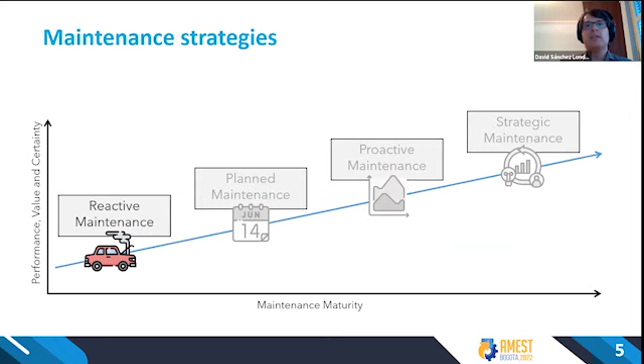So maintenance strategies have evolved ever since the first industrial machines required any sort of repair, right? So a long time ago. And these strategies have matured from simple corrective actions to more complex strategies. So the first of these strategies used to maintain machinery is reactive maintenance. And in reactive maintenance, we handle failures once breakdowns occur, right? So this means that machines operate until they fail, and at this point, they are repaired, if possible, or replaced with new machinery.

Now, this strategy can lead to unexpected machine downtime and high economic consequences because of the cost and the resources that are associated with repairing machinery that fails unexpectedly.

So as time went on, engineers realized that for the most critical machines, they couldn't simply afford to just let them fail. So planned maintenance was born. Now in planned maintenance, we have an association with maintenance actions and periodic intervals. So these intervals can be time-based, so we will perform maintenance every 25 days, for example, or they can be usage-based. So we will perform maintenance every 200 hours of operations, which can be 10 days, 30 days, and anywhere in between. So this can prevent failures by identifying and correcting deterioration before it becomes a fault.

However, it is unable to detect random failures that don't follow this "as time goes on, it fails" pattern, right? So it also has the issue where we perform maintenance actions preemptively on the equipment, and these actions might not actually be needed. So we might be wasting time and money performing maintenance actions.

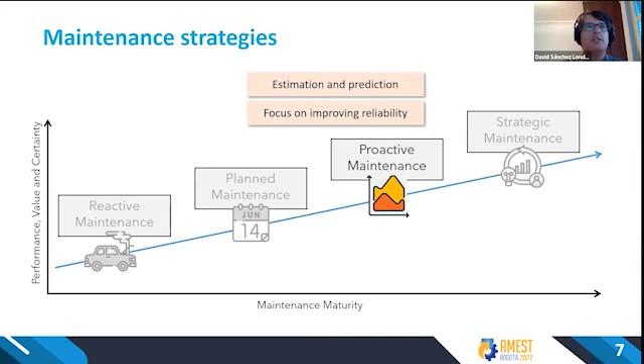And so that is where our final maintenance strategy comes in, which is strategic maintenance. Now, strategic maintenance adopts a perspective of asset management. And what I mean by this is that instead of focusing on increasing asset reliability, asset management aims to realize value from assets in an organization. So it exploits assets towards achieving organizational objectives. Now, this means that instead of, for example, focusing on reducing the maintenance costs of systems, or increasing their reliability and their maintainability, in strategic maintenance, we actually consider maintenance as just one of many processes that are involved within the asset management landscape. And so here, management decisions are made considering the impact they will have on the entire management process, not just maintenance.

And what this means is that maintenance is not considered in isolation anymore, but instead it's considered as a part of the whole organization. And in this context, the conflicting goals of these multiple departments, so operations, maintenance, logistics, and so on, must be balanced to obtain a solution that is in the best interest, not of one single department, but of the organization as a whole. So any maintenance decision that increases maintenance performance, but for some reason decreases the overall organizational performance, such as excessive planned maintenance, for example, would be discarded under the strategy of strategic maintenance in order for decisions to more closely follow the organizational objectives.

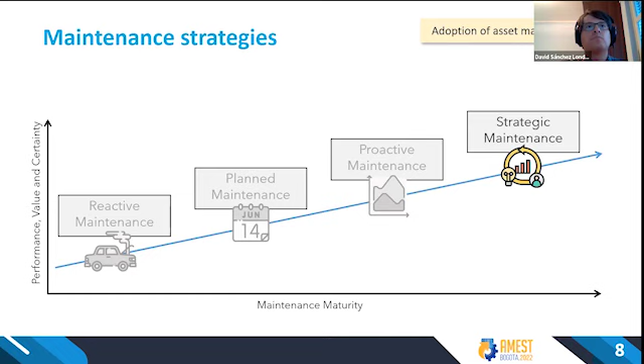Wait, why doesn't, okay, here we go. Now, so back on topic.

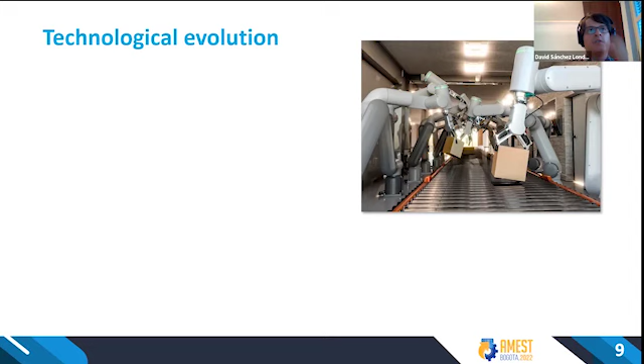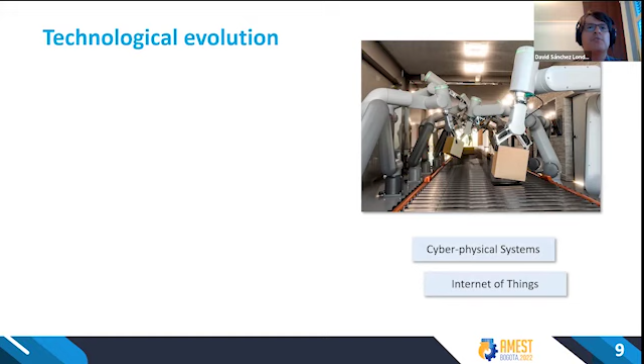As I mentioned earlier, this evolution of maintenance strategies is actually parallel to the evolution of maintenance technology, which is actually our focus for this talk. So what happens is that technologies such as cyber-physical systems and the Internet of Things have led to this trend of automation in the manufacturing industry. Now, this trend has a lot of names. It's been called the fourth industrial revolution. It's been called Industry 4.0. It's been called smart manufacturing. And all of these are slightly different. They might have slightly different meanings, but they're usually used interchangeably.

So for the purposes of this talk, I will actually be referring to something called the digital transition. Because rather than a discrete revolution that can be pointed to a specific point in time, which is usually said to be 2011, I see it more as the last few decades having brought the adoption of multiple technologies into the production landscape, bringing this sort of gradual transition to a smarter industry.

But just keep in mind, when I say digital transition, you can think of Industry 4.0, you can think of smart manufacturing, think of whichever term you are most familiar with. Now, this digital transition actually involves a vision of enabling transparency. What does this mean? It is the ability to measure the actual manufacturing capability of a system and measure and reduce uncertainties.

So, for example, the planning of actions in a manufacturing system often assumes that machines have perfect availability. And they also assume that they have perfect performance. And the problem with this is that when machines fail, because they will fail, or when they produce at less than perfect efficiency, replanning processes have to take place. We need rescheduling processes to occur.

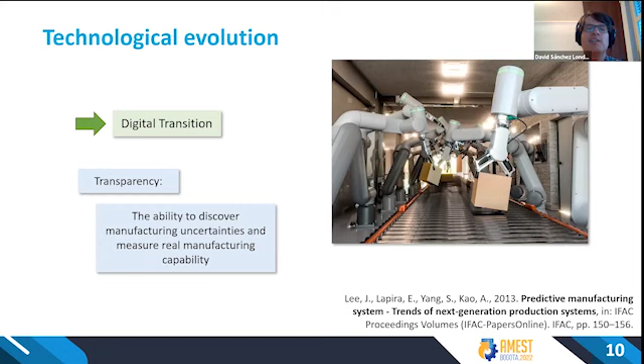Now, in general, this sort of insight into the real state of machinery enables optimization of existing manufacturing processes, one of them being maintenance. And in particular, increasing the transparency in manufacturing through these digital transitions enables the rise of the two last sorts of strategies of maintenance that we discussed, which are proactive and strategic maintenance.

Now, in the case of proactive maintenance, a transition towards digital means enables failure prediction. So many failures can be predicted in a machine by monitoring and analyzing its physical conditions. Now, this failure prediction capability is enabled by data analysis processes that can extract useful information from data that is collected by sensors in machines. And it allows for maintenance actions to occur just before failures occur.

On the other hand, we have strategic maintenance, which can benefit from transparency by quantifying the contribution that maintenance brings to organizations. So all the decisions made in strategic maintenance actually intend to fulfill the maintenance functions, but most importantly, supporting asset management or organizational objectives. And because of this, all maintenance decisions actually have to consider organizational objectives.

So once maintenance decisions are made and the resulting actions are executed, the contributions of each specific decision can be evaluated through this increased transparency so that further decisions can continue supporting asset management. Now, I've been talking about maintenance strategy, I've been talking about technological evolution. So where does smart retrofitting come in all of this? Well, now that we're on the same page regarding maintenance strategies and how technology has evolved alongside these maintenance strategies, we can discuss smart retrofitting itself.

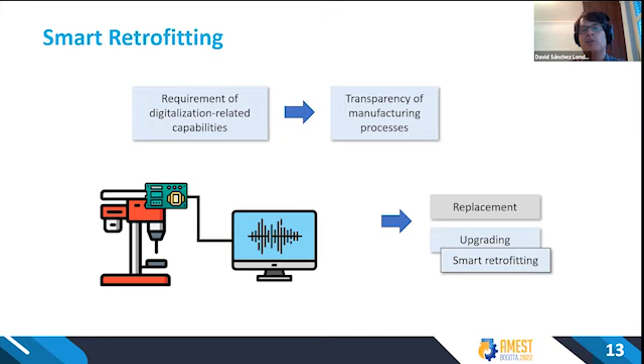So what is smart retrofitting exactly then? Well, smart retrofitting has been referred to as the integration of new technologies into legacy systems to enable the digital transition. Now, with legacy systems, we refer to quote unquote old equipment, right? So this equipment that doesn't have capabilities required for the digital transition. And so smart retrofitting is this action that aims to transfer the requirements of the digital transition vision to legacy machinery, using the lowest time and lowest capital investment that is possible.

And so when we talk about smart retrofitting, we should be focusing on identifying these capabilities, these requirements, and figuring out how to enable them in machinery that do not have them. Now, more formally, smart retrofitting in maintenance refers to the development of maintenance services through the retrofitting of legacy devices with these following functionalities: data collection, data communication, and data processing.

Now, this definition comes from a review on existing smart retrofitting literature. This review is still not published, but it should be published in the coming months. So for anyone that is interested, you can look for this document in the coming months. Now, let's look at each of these components individually.

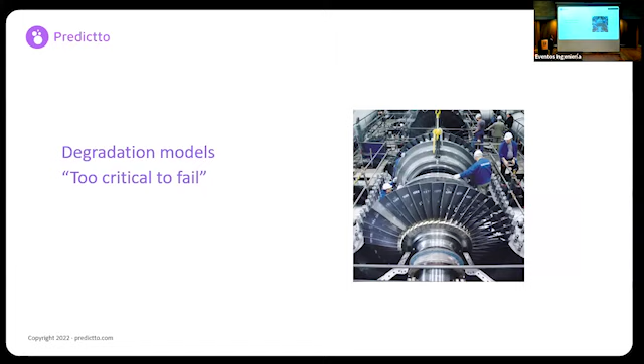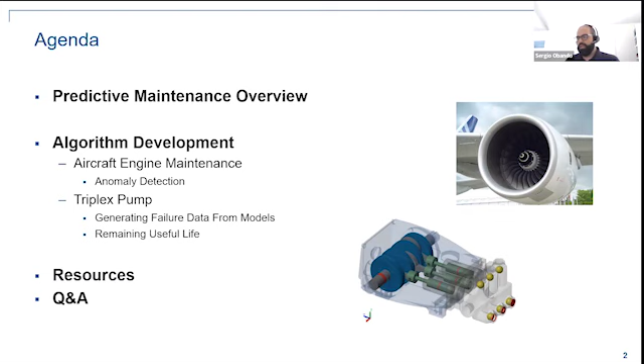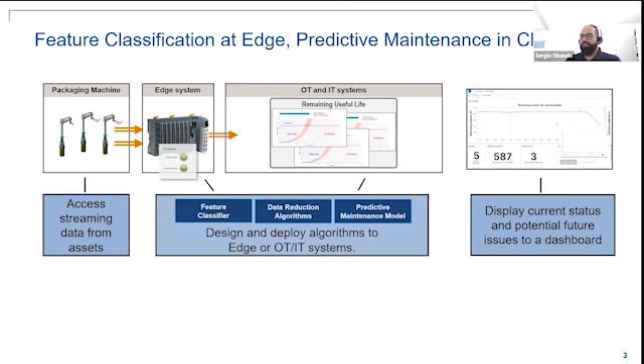Again, part of what we want to learn through predictive maintenance is, what is the useful life, or what is the maintenance cycle that I want to have for my assets. And while the end goal is something like this dashboard where I can monitor and see what is happening, the reality is that there are a lot of things that need to happen before I'm ready to do that. I need to have assets that can transfer and transmit data. I have to be connecting to that data. And then once I have that data, I have to make some kind of use of it, right?

And this may require pre-processing of the data, selecting the appropriate algorithm, and then tie this to the predictive aspect, meaning can my data help me make a business decision based on my available information. So some of the examples we will see today is, well, how do we actually get to that model? And what you're seeing on your screen is what could be an HMI or a dashboard for an operator. And it's just giving me a high level view of what is happening with my machines.

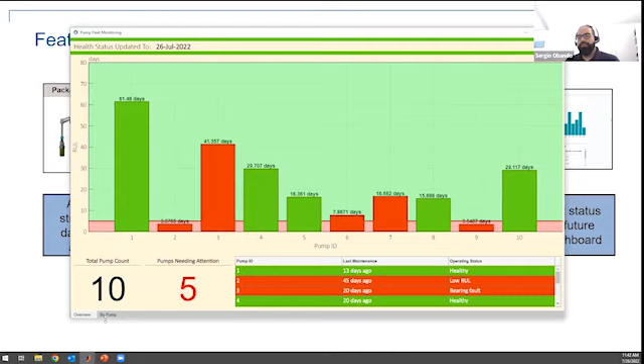So here from 1 through 10, you're seeing different pumps. And what is being predicted here is how many cycles or how many days until I need to perform maintenance on it, right? So we want to predict that. And behind the scenes, what you see, some of the machines do need maintenance. And again, this can help an operator assess and prioritize those machines that may not be working correctly.

And again, when we say failure, I want to clarify, failure is not that the machine explodes or something like that. It just is reaching an undesired performance, or something that I'm measuring is not doing what it needs to do.

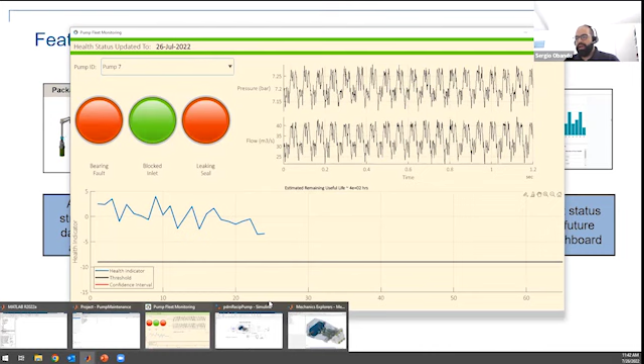Now, how do we arrive at a model like this? I will show you later on how we can build models and create synthetic data that can help me not only simulate types of failures that perhaps I won't be able to encounter easily in practice. It could be a good way to manage kind of the limitations of having one-sided data.

And I think Juan answered this question from somebody in the audience, right? Like, what happens if you have too much data leaning towards normal operation and not enough failure data? So this can also be a technique that is available for something like that. We'll come back to those examples. Like I said, I just wanted to give you a quick glimpse of where we are heading with this presentation.

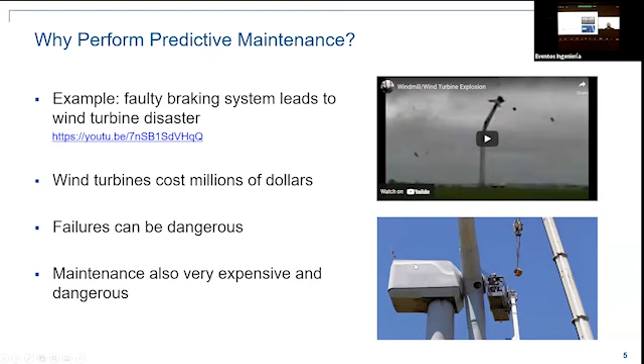Now, there's another aspect of maintenance that perhaps is not seen here. And again, there's a really big business opportunity for a lot of companies to provide predictive maintenance services, both to their own clients and to internal clients. Something that you may be seeing already is like your refrigerator or your dryer or your washing machine has some kind of maintenance device that can emit a sound or give you a code. And with that code, you can call the company and tell them, what is happening with my machine? Should I service it? So there's a big business opportunity on the other side of the spectrum, where a lot of industries are looking to carry out predictive maintenance.

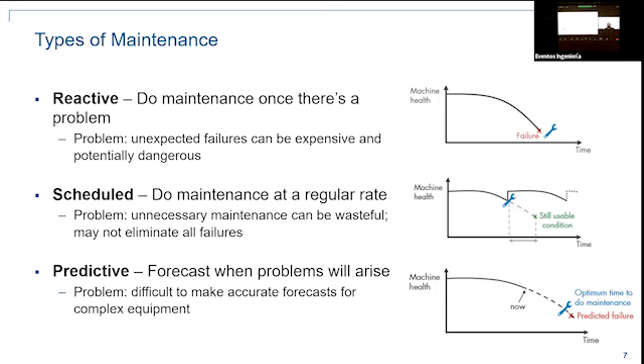So once again, I'm not going to go too much into the detail here. I think both David and Juan covered this really well. So we have 3 types of maintenance, right? Reactive, like changing something when it breaks, the battery dies, so I change it. Scheduled, like changing the oil every number of kilometers for your car. And then predictive, when I want to know what is the ideal or the optimal cycle or number of cycles to perform maintenance.

So I want to give you a couple of quick examples of customers that have actually implemented predictive maintenance algorithms with our tools and that have been successful doing so. And again, I think the problem that you saw and that was mentioned in some of the other presentations is different industries are at different stages of this whole AI and Industry 4.0 mega trend, right? So some industries have very old assets, some industries have newer assets, some industries can afford to buy new assets and just discard the old ones. So there's always kind of a mix of things when you see this.

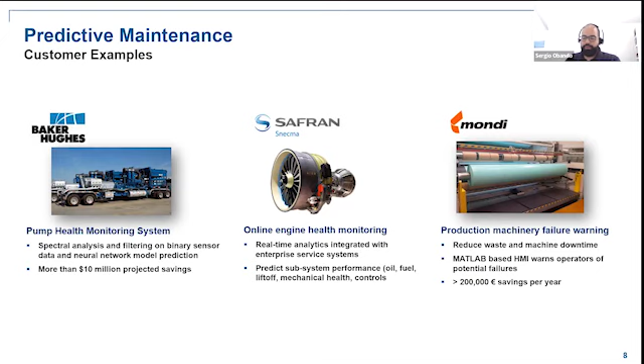On the left side, you see somebody like Baker Hughes, who was able to implement a monitoring system for their pumps used in the extraction of oil. And on the opposite end of the spectrum, we also see algorithms that are used to help operators potentially identify operation of their machines that are coming out of a desired range of operation.

So what does a predictive maintenance algorithm do, right? It's going to help me make a decision based on given available data. And this was mentioned, this may be very large data sets for some companies. There are some industries that have been collecting data for ages, 20, 30 years of history. So this may involve big data problems as well as machine learning algorithms. And we typically will ask ourselves 3 types of questions here.

Is my machine working normally? This is what we refer to as anomaly detection. Why is my machine behaving abnormally? This is more about condition of the machine. And then how much longer can I run this machine before it fails? And this is something called remaining useful life, or RUL. And these are typically the type of questions that we want to answer with this available data.

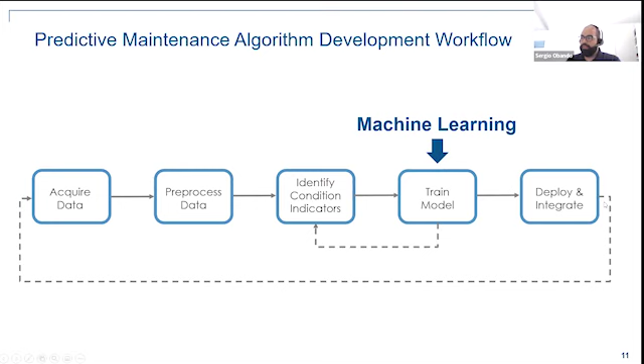At the end, where we want to get is to deploy and integrate these models into our production environment. And obviously, this is not a static model. I think we also heard a question from the audience, right? Some of these models need to be updated, need to be reassessed. And obviously, there are some challenges with that. But overall, we need to know that this is not a static thing that you do once and then move on.

Now, why is machine learning coming into play for many of these types of problems? Again, the whole idea behind machine learning is that these algorithms or techniques create models that learn from data without actually programming them to, right? You don't have to write all the logic, or find an equation per se. Many of these techniques just learn from available data and are able to make predictions fairly accurately. There are many flavors of this as well.

For instance, unsupervised learning, where you don't have any labeled data. So this is just more about finding trends within the existing data. This may come into play, for instance, for anomaly detection, right? I just have vibration data, and I want to know if something is off compared to all the other data that I have. I don't have a particular label to it. I haven't said the machine was operating normally or abnormally, but I want to find trends or some kind of underlying behavior within the data.

Supervised learning, again, is more what typically would come to mind. This is just input, output, a kind of black box in the middle, and I'm trying to make predictions, right? So I feed some sensor data, and the prediction is I have X or Y type of failure, for instance. And another set of techniques that may come into play are things like deep learning, which is just a more specialized type of machine learning algorithm.

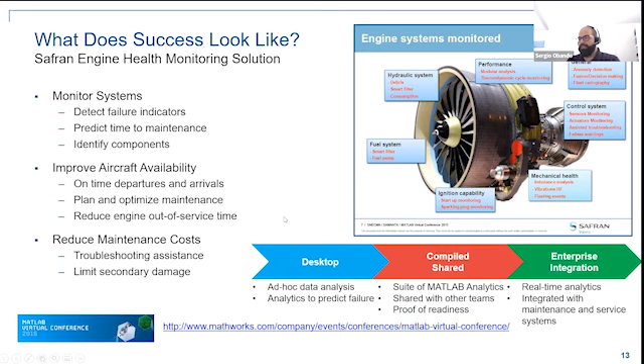So what does one of those models actually look like in operation? Some of the things that may happen is that you put the device on board the asset, and you carry out this process that I described: analyze the data, find a model, compile it, and integrate it. And this is what Safran did. This is one of our virtual conference presentations from 2015, where they were implementing these techniques for a jet engine.

So the example that I have today is a fairly well-known data set of 100 jet engines, and the data itself actually contains failure. So they have run-to-failure data for these 100 engines. But let's assume that we have some historical data about these devices. Can we find anomalies in this data? Can we find where the engine started behaving abnormally?

Now, I can't really see the audience, but if somebody can help me gauge how many people have experience with MATLAB, I just want to know how much detail I have to go into, or if I have to give you a sense of what the environment looks like. Can we just take a quick poll? How many people have seen or used MATLAB in the past?

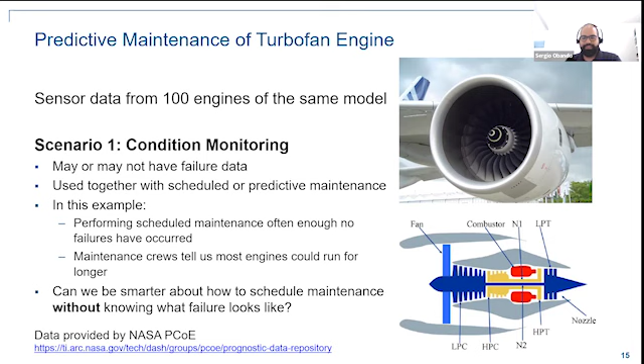All right, so for those that have never seen MATLAB, MATLAB is an environment that has an underlying programming language that is used for algorithm development, it's used for mathematical modeling and simulation of systems. So there are many libraries that we call toolboxes that align with different areas of science and engineering. So what I want to show you today is related to our predictive maintenance products. And I just want to show you a quick example.

So I'm going to use an unsupervised technique to find anomalies in the data. And I've mentioned this is some engine data. So let me give you a quick glimpse of what that data actually looks like. So what I have are 100 Excel sheets. Each of those Excel files corresponds to one of the engines. For each of the engines, I have the engine number, in this case 1. I have the different sensors, which in this case I have 14. And I have a time variable, which is referencing the flight cycle that corresponds to when the sensors were measured.

All right, so the first thing that I want to do, and again, if you're not familiar with the environment, it is fairly easy to learn. And I'm using this live script environment, which is a way for me to execute and comment or document my code. So when you receive this, there'll be the context of what we're doing today. We have 100 aircraft engines. Maintenance is done after 125 cycles. So we're going to look at those 125 cycles for all 100 engines.

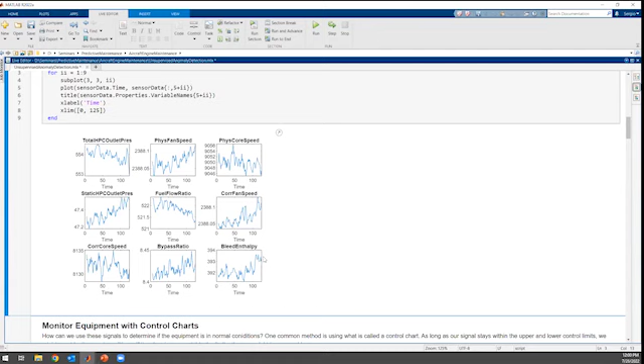And again, if you're not familiar with the asset, this may be kind of hard to interpret, but really many of the predictive maintenance approaches rely on the collaboration of the analyst or the engineer creating the algorithm with the maintenance department or the experts in the area. So sometimes you can call this human in the loop, right? So one of the maintenance personnel may know, oh yeah, this is really not that great. I would think that around here, I would probably start thinking of doing maintenance for this engine.

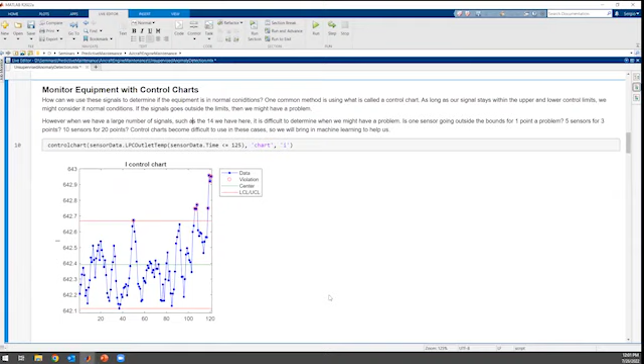There are more formal ways to do this, although don't be surprised if this visual inspection is done in many industries. There's an expert that has a calibrated eye, and they're the ones that know when things need maintenance. But you can more formally do this using things like control charts. And you may say, well, after I have 3 or 4 points that go above the upper or lower controls, I may start deciding to perform maintenance.

Now, part of the idea behind predictive maintenance is that you have to manage very large collections of data. So this is really something that has made my life a lot easier when I'm doing this kind of analysis. It's something called a datastore. And what I'm going to use that for is to tell MATLAB that I have a collection of folders and data within those folders. And I want to use all those folders by reading or potentially analyzing all of those files.

Something a little bit more advanced that I'm doing here, and again, I don't want to get too much into the weeds here, but I'm using something called a tall array, which is going to help me manage the fact that this data may not fit in the memory of my machine.

So let's say you have 30, 40, 50 gigs of data, so a big data type problem, then you have to find some ways to either sample or subsample your data, or pick a smaller population from the available data set. Now, with this kind of techniques, I can just let MATLAB do everything, and I don't have to adjust my analysis to the fact that the data may not fit in memory.

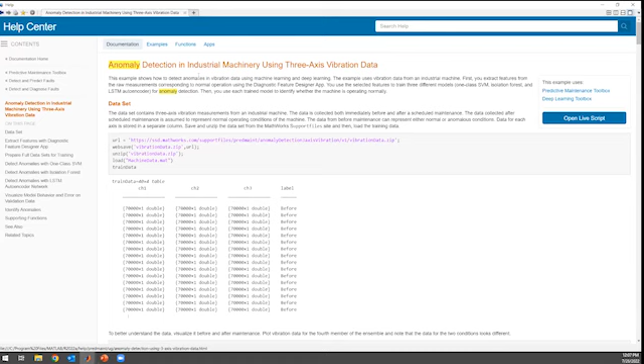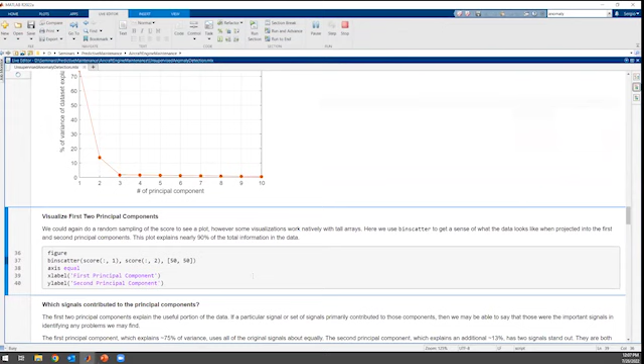For predictive maintenance in particular, there are also a few application examples for different types of machinery. So in this case, we're using vibration data, and I believe they use an SVM to detect anomalies. All right, now going back to PCA, what I will do here is use principal components 1 and 2, and look at all the data by mapping it to these two principal components.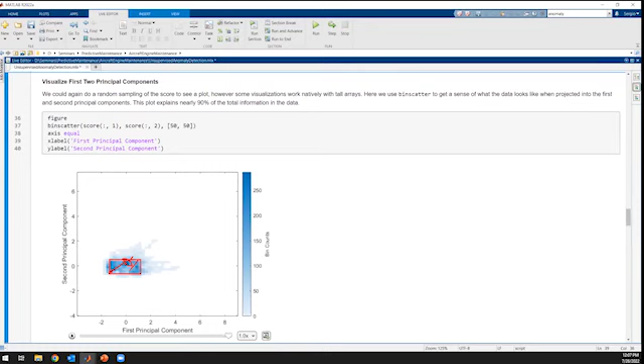And then you have all of these additional values that fall outside. And I should have probably picked different colors. This is probably green, meaning it's functioning well. And all of this outside is probably where we may start seeing some deviation from normal functioning.

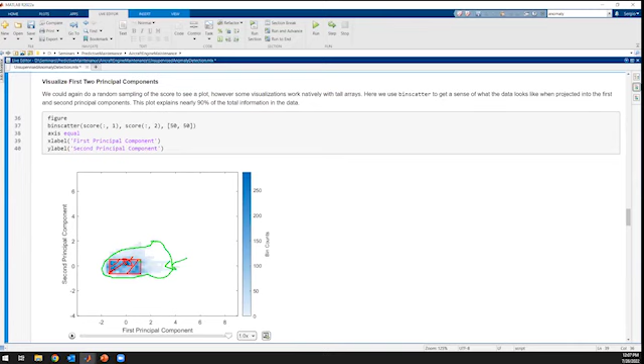So let's pick one engine and let's take a look at how those engines map to this new set of principal components. And this section here that I quickly browsed through is just a way to tell what is the contribution of each of my predictors to the first principal components. So it looks like most of them contribute about 20 to 30%. So there's a good amount of contribution for all of them. But this is just, again, a way for you to assess which one is the more dominant predictor for your principal components.

All right, so once again, I want to take a look at one of these engines, and I want to see in this new framework, which is principal component 1 and 2, where are the points where the engine starts and where the engine ends. And the reason why I want to do that is I want to know if these principal components can help me detect anomalies, right? Can help me find where my engines are falling outside of normal operation.

All right, so a quick picture here. In blue are the first points, meaning cycle 0, the first measurement that I took in the history of that device. And then all the points in red, which are all this bigger area here, are points where the last measurement, meaning after 100 cycles, mapping those sensors to those two principal components, this is where the value of those sensors ended up.

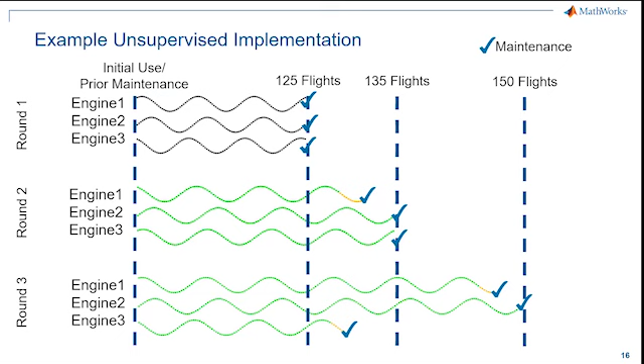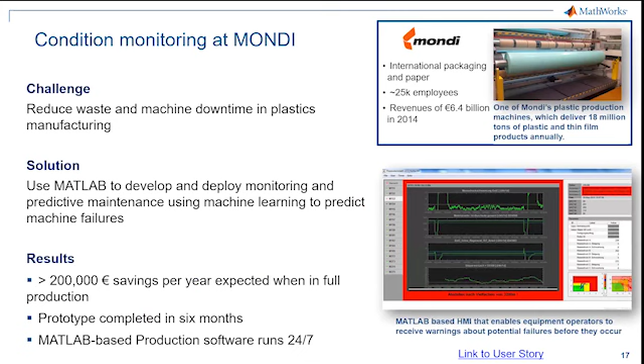All right, so I mentioned that I wanted to do 2 examples. So with the remainder of time, I want to start looking at what happens if I don't have sufficient data? Or what happens if potentially my device cannot be instrumented quite yet? So it may happen that I actually understand very well how the device works, or it's a fairly well-known device, and I can create a model.

So you may have heard this expression of a digital twin, right? A digital model of my working asset. And I will use this digital model to help me guide and potentially make predictions. So this is a triplex reciprocating pump.

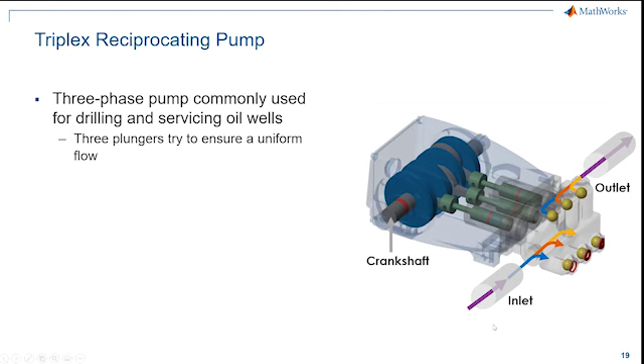And again, what we want to do is simulate different types of failures that can occur with this device. So the types of failures are coded with these 8 different codes, and it's basically different combinations of these potential parts that tend to fail or require more maintenance. Once again, I'm relying on the experience of my personnel or my maintenance department to help me guide how effective these predictive maintenance algorithms can be.

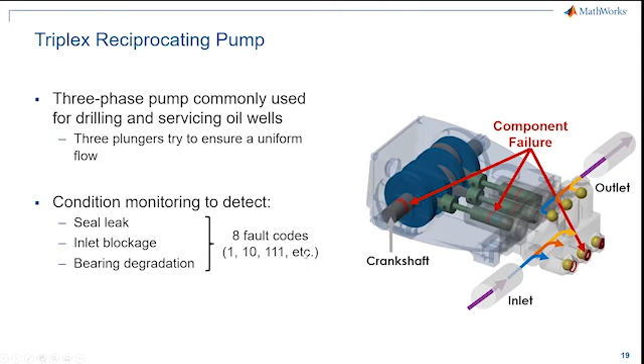So I have 3 parts that were identified to be the more prone to maintenance. And I use the combination of those, right? So 2 to the 3 is 8, and those are the 8 different fault codes that I can get. So what I'm going to do with this is I want to give you a quick view of what the model looks like, and a quick view of how to build a model based on that.

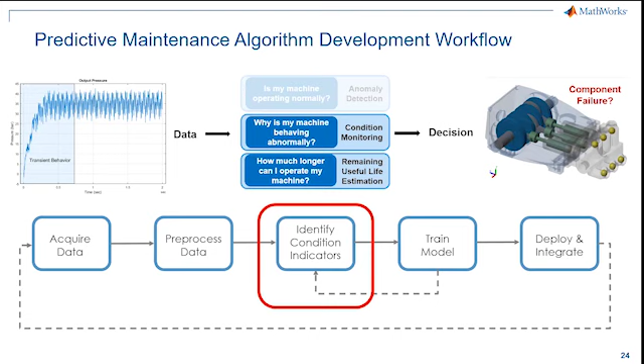So let me go back to MATLAB. And let's look at the pump maintenance example. All right, so let me once again show you this model of the pump that I showed you earlier. So this is what the actual pump model looks like.

And what I'm using here is a platform from Simulink, which sits on top of the MATLAB environment. So Simulink is built to simulate dynamic systems, and it helps me tie physical modeling of multi-domain type problems and the mechanics or the dynamics that go behind the scenes. Now, let me just start running this model. And again, you already saw me do this earlier.

I'm just going to run this pump under normal operating conditions and take a look at some variables of interest. So the 2 variables that I'm going to be simulating or keeping tabs of are things like the flow in and the flow out of the pump, as well as you can look at things like input pressures and so on, and input flow to the pump.

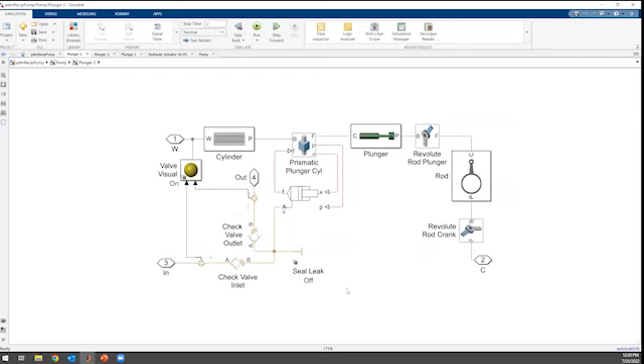All right, so here is just the animation under normal conditions. And again, there are a lot of things that go behind the scenes to create this kind of model. So if you're curious what goes behind the scenes, you can certainly take a look at each of the components and the different ways that this is being modeled.

And I'll share some resources at the end of the presentation so you understand how to build these models from scratch. We also have a webinar called Model-Based Design with MATLAB, with Simulink, which walks you through the process of creating this type of models.

All right, so let's look at the flow rates in and out. So we have flow in and flow out of the pump, and this is what is occurring under normal conditions. Now, I said this type of digital model can help me model certain types of failure. So what we did, we integrated different types of faults that I can just turn on or off.

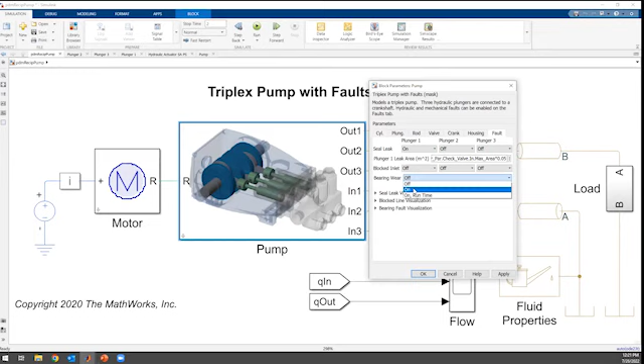So I'm going to, for instance, say that in one of the seals or in one of the plungers here, this is going to be leaking, right? It's going to be letting a certain amount of fluid out. And I'm going to say that there's also some kind of bearing wear right here on the rotating part of the shaft. All right, so I'm going to apply this. And I'm going to run my simulation one more time.

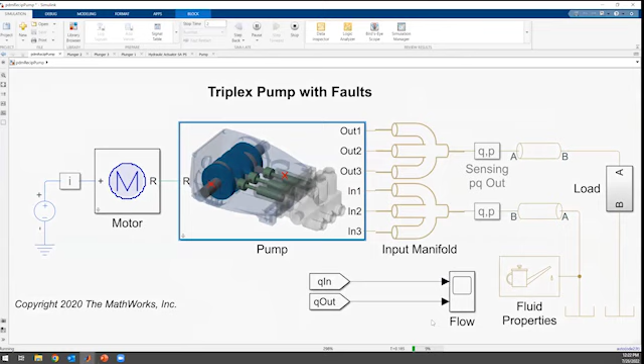All right, so this is again the physical view of what is being simulated at the time. And again, I'm just simulating a small fraction of time. So if you have very large models, if you have a lot of components, there's certainly a lot of things that we can do to optimize and also scale these models using cloud resources and compute.

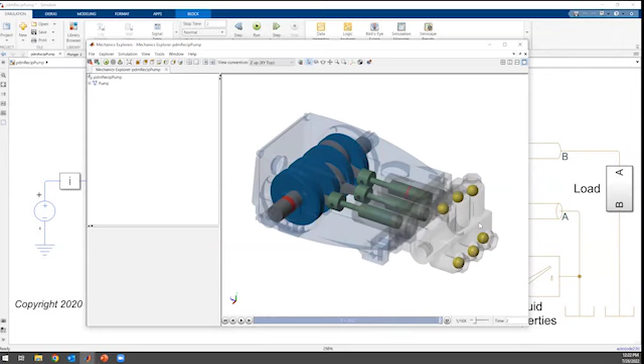All right, so now let's look at the flow, right? So if you don't remember exactly, this looks very, very different to what we saw on the normal operation. And again, one thing that may not be immediately obvious is that it is very costly to get failure data. And it may be almost impossible to simulate or capture the data for some failure modes.

So here, there's a way for me to create models and tune those models to be a good representation of the physical asset. Now, as a maintenance personnel or as an engineer, I can start looking at all of those simulations and see if there is really something different, right? So let me look at the flow out of this. And let's look at the flow out on the normal conditions. So you can see that it's very different.

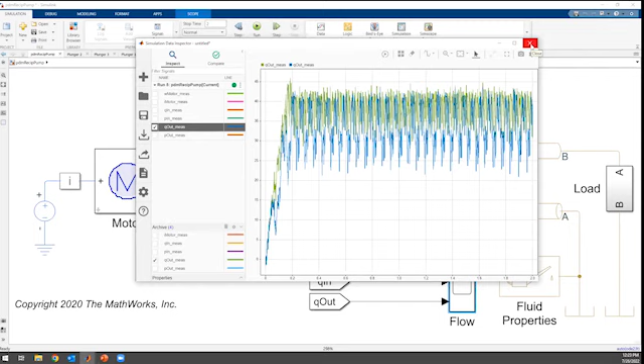And again, this is the type of data that I can now take to my machine learning model or my remaining useful life algorithm and use to make predictions. So let's do exactly that. So going back to the workflow, again, we have to acquire or create synthetic data. We pre-process that data. We identify condition indicators, and then we train the model.

So the first thing that I'm going to do is some feature extraction. So I need to be able to feed features to my models. And luckily, I have this digital model. So I'm going to generate a huge sample of those histories or those signals. And then I'm going to create predictors or condition indicators from those.

So all I've done so far is I've loaded my data, but let me use something called the Feature Designer app. What the Feature Designer app is going to help me do is interactively create or compute features. So let me just move this to the other screen. The first thing that I'll do is pick my data set. I'm going to pick the sensor data that I measure or that I synthesize, which is flow and pressure.

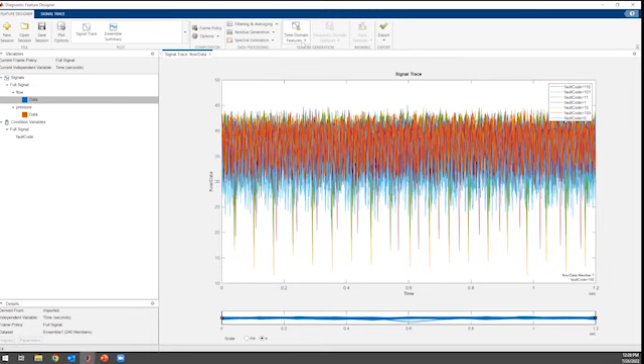All right, so let's compute, for instance, some signal type features. These are time domain features, typically what you would expect for values of interest, things like kurtosis, mean, standard deviation, and so on.

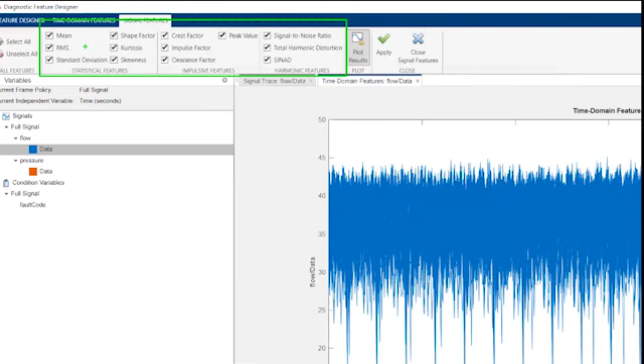So with just one click of a button, I can just select all of this and say apply. And what MATLAB is going to do is run through all of those 240 histories and compute all of these features for you.

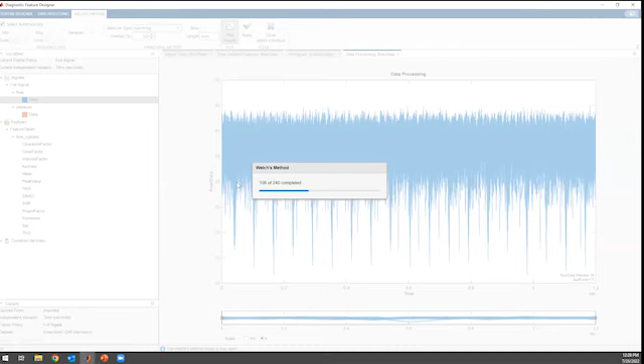So we can go through this process, and again, these are time domain features. If I'm interested in computing things like frequency type features, I can also compute the spectrum of those signals. And then with that spectrum, I can compute frequency domain type features. And again, for rotating machinery and many assets, that may be a very powerful predictor, as many of the presenters have also described. So shift in frequency, damping and so on is a very good indicator of a lot of failure types.

So now with the spectrum, the last thing that I do, like I said, I can generate spectral features. And then at the end, once I have a very large collection of features, I can rank those to know which of these features capture the variability of my data best. So for instance, here, it looks like for the flow rate, at least, the RMS tends to be of more importance, based, in this case, on an ANOVA type of analysis.

Now, what is the next step in that workflow that you saw in the slide? Once I have computed features, I can use those features and pass them to my algorithm. And if I'm using a machine learning type of technique, I could just feed that into my machine learning model.

One thing that I want to point you to is this option right here, which helps me take all of this interactive process that I've done, so all the point and clicking that I've done so far, and create MATLAB code that takes care of all of that programmatically. Now, why would that be important? Because more likely than not, what I want to do is put this in some kind of automated or production type environment, where most likely I won't have the possibility to do point and clicking. I want it to be automated.

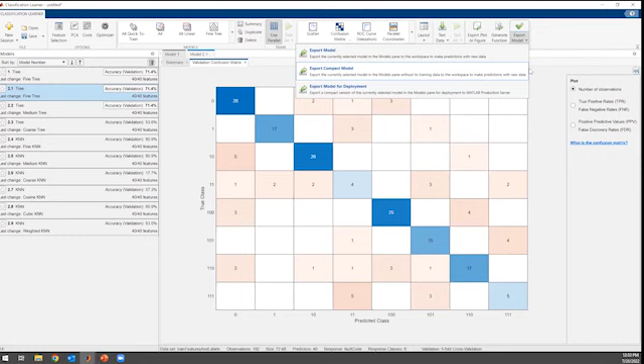All right, so for the last part, let me just come back to my example. We take those features, we train a model, and at least with just the first approach that we did, we get about a 71.4% accurate model. There is an additional section of the code where we tune the hyperparameters and we do some additional tweaking until eventually we can bring that model up to about 95% accuracy. All right.

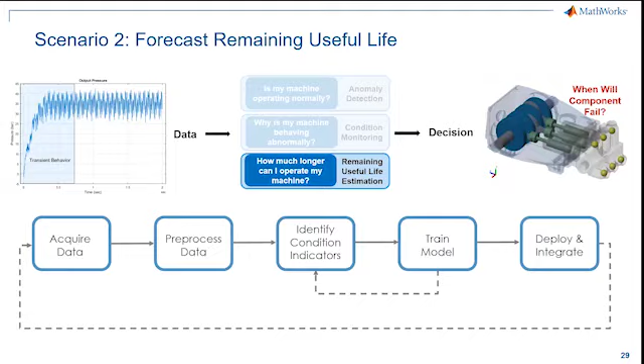So there was one part that I did not cover at length, but is fairly important to predictive maintenance, and that is this aspect of remaining useful life. So I just want to quickly give you a glimpse of what that looks like. I believe the two prior presentations showed us a little bit of the algorithms that go behind the scenes, so let me just make reference to those. So you may have things like similarity models. This typically means that you have run-to-failure histories of the machines that you're trying to diagnose, and you're comparing those run histories to new machines or new data as it becomes available.

Degradation models, so those are typically those where you know the range of operation of a condition variable, and you're using that range or that threshold to prescribe a range and fit a time series model and use that to make the assessment of the remaining useful life.

And then the last one, which I believe my colleague Juan explained in a lot of detail, is survival type models. So it's using things like proportional hazard models, probability distributions, and this is typically using lifetime data of similar models. So the difference here is, think like, I have batteries and I know how many days the batteries have lasted historically, and I want to know what the durability is of a new battery in my production batch. So we have in our library and in our toolbox all of these types of algorithms.

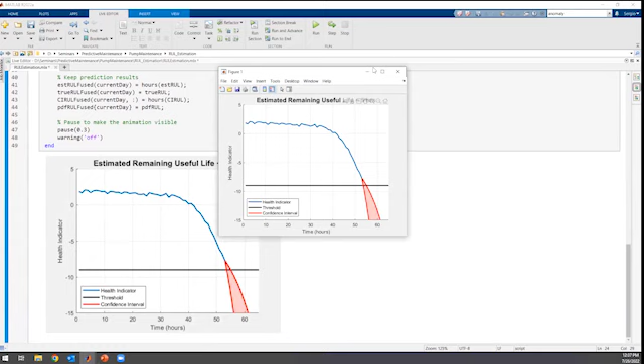As I do have historical data and known thresholds, I can use that to update my model as the data comes in and see what the remaining useful life of the asset looks like. So I'm going to let that run, and at the end, I'll show you what this animation looks like. Okay. So this will be the final results, which tells me that for the particular pump that we picked, there was about 5 hours left of operation.

So let me run this again over here. For some reason it was running on a different screen. My apologies.

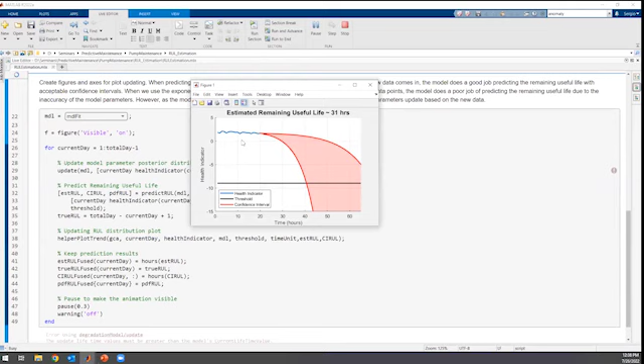Here it is. So as we feed the data to this remaining useful life model, you can see that we are trying to find similar models or profiles based on others, until we can narrow down to the current state of that device.

Now, I know that I went fairly quickly over this, so I just want to point you to the section of the documentation where we cover this in a lot more detail. So if you go to the Predictive Maintenance Toolbox, you are probably going to see some similarity to today's presentation, where we start discussing data management, pre-processing, generating indicators, and then detecting and predicting faults.

In this detect and predict faults, there's a section for remaining useful life, and you can just look at particular application examples. Or if you're interested in the different types of models that are available, then there's a good diagram here and an explanation of what each of those models is capable of, or how to best pick the right model for the right type of data.

All right, so let me just go towards my concluding slides. Second here.

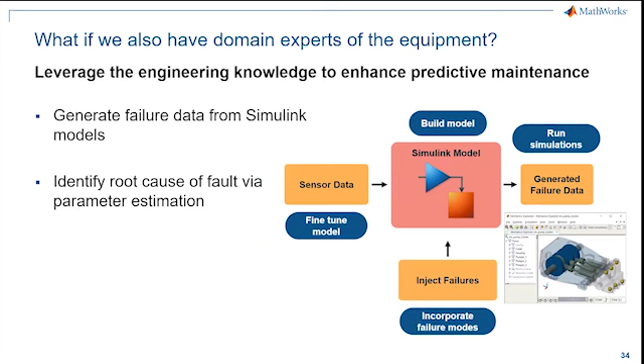All right, so again, we want to use the expertise of the equipment manufacturer, the equipment maintenance department, and we can use that to build a model, inject failures, and synthesize new data. We can fine tune that model using sensor data and use that to get the most accurate model. So that was the last part of what we did based on the triplex pump.

All right, so at the end, what you want to deliver, or what many people will deliver out of this model, is some kind of practical or deployed model. And that may take the form of a dashboard. It may take the form of some kind of alert system. And again, there are many ways in which this can be incorporated. Now, for our tools, we typically provide a large flexibility.

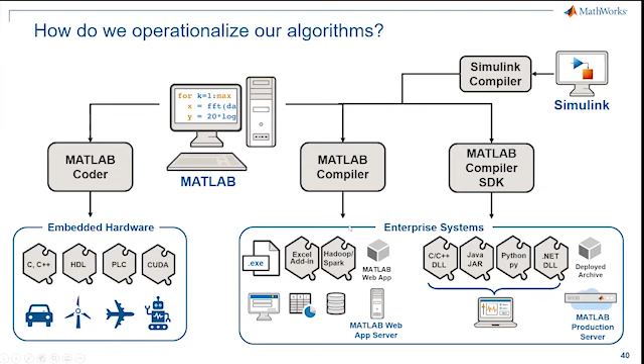You may decide that you want to generate PLC code directly from your algorithm to your control system. You may decide that you want to translate that to C or C++ to put it on an edge device, or you may create some kind of dashboard to be integrated in some kind of deployed or cloud system for operators to take a look at. Again, this is a high-level visualization of what we went through.

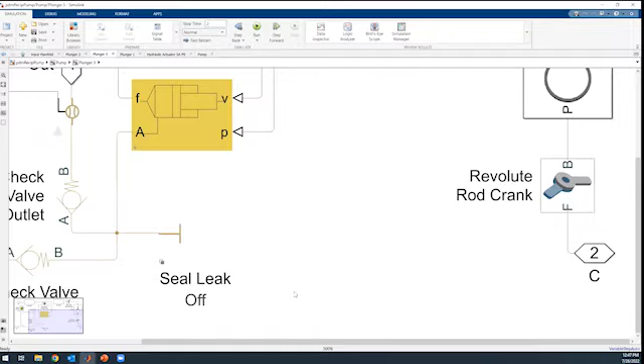Correct. So, for instance, in the manifold, I may be able to put some of the failures. If flow is going through a particular pipe, I may put some kind of chamber, and that is going to simulate that it's not working. Or a seal leak: for some of the components, we actually have models that incorporate that into our libraries, so you can just select that type of situation. You may be able to put a port into your valve, take a little bit of fluid out, and model an orifice, which is simulating the leak.

But I understand where the question is coming from, and that's why I wanted to give you two flavors of it. The first one is the ideal scenario where you have tons of data, you have failure data, and things are very easy. And then the one where you have a digital model that may not be perfect, but it may be a start. And as you start collecting more data with your real assets, you could really tune that model to be a good representation of the real asset.

But typically this may be a staged approach, especially if the type of device that you are modeling is not well understood, like some kind of oven, or the physics are too complicated. So it may be very hard to generate something like this for that.

Yes, thank you. One last question: how do you compare MATLAB with the open source libraries that are available, especially in Python? What are the advantages or disadvantages of using MATLAB? So that's a good question. It's a little bit philosophical, but at a large level, we see that many customers and engineers are using a combination of tools to use the best tool for the right thing.

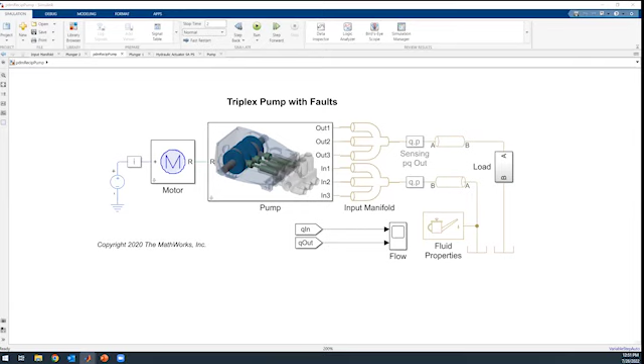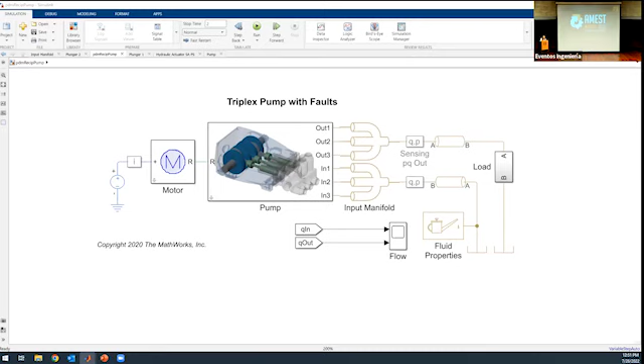Thank you, Sergio. For our last conference of this graduate pre-workshop, Carlos Mortera and Daniel Garcia will talk about smart retrofitting solutions for the Latin metalworking industry. Carlos graduated from Monterrey Institute of Technology with a BS in Computer Systems in Monterrey, Mexico, and pursued master's degrees in Business Administration and Manufacturing Science from the same school. Mr. Mortera's experience in the industry includes working for Emerson Electric, where Carlos held several positions in industrial engineering, international trade, finance, HR, and materials in North America. He also worked at Cummins Inc., where he was responsible for various areas such as procurement, IT, operations, engineering, and general management for their business in Brazil and Mexico.

Carlos' experience also includes working as VP administration for a sanitary ware company from Asia and managing a multinational company producing and marketing cooling towers in the Americas. Carlos lived in Sao Paulo, Brazil for 4 years as general manager of the Brazilian division of Cummins Filtration and exhaust, traveling extensively in South America. Carlos joined AMT in 22. He is fluent in 3 languages and has broad experience greenfielding and brownfielding small to large operations. Finally, Daniel García graduated with a mechatronics engineering degree from Technological University, Escobedo, and also completed a technical degree in electronics and automation from the same university. He has diplomas in automation, artificial vision systems, lean manufacturing, leadership, and certifications such as ISO Internal Auditor.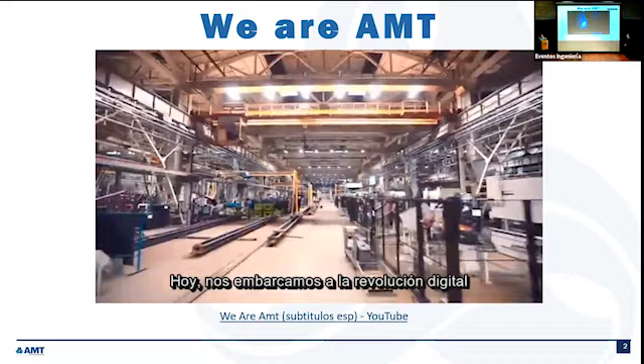Manufacturing, the bedrock of the modern world. The Industrial Revolution gave us the mill, the lathe, the grinder. Small gestures that left large strokes. And through the decades, AMT members dreamt, built, pushed. Advancements came in waves, their spray lighting new horizons in the sunlight. And in the warmth left for others to feel, our members reached for possibilities that others could not see. Since 1902, AMT has seen it all because our members built it with the tools we gave them. Today, we embark upon the digital revolution, where manufacturing technology opens new doors to new realities and to solutions to questions we couldn't dream of. Today, we continue to shape the future of our industry by advancing new tools for a new age. The place where leadership, manufacturing, and technology come together in unity. AMT, Advancing Manufacturing Technology.

Explaining to you all some of the benefits and what is the actual state of the ecosystem in Latin America and the rest of the world as it relates to what we do through AMT. But quickly, what we do at AMT is basically we facilitate forums. We're always trying to promote the technology transfer and making sure that the end users of the technology are well versed on what is new.

And that's where the interaction with some of the universities like Uniandes, Tec de Monterrey, and many more universities both in the United States and around the world help us promote the technology transfer and making sure that the platforms and the curricula and the whole syllabus which is presented to the students is really reflective of what the industry is needing. We also have a lot of events that we produce. One of those is the largest manufacturing technology show that is presented in the Americas called IMTS.

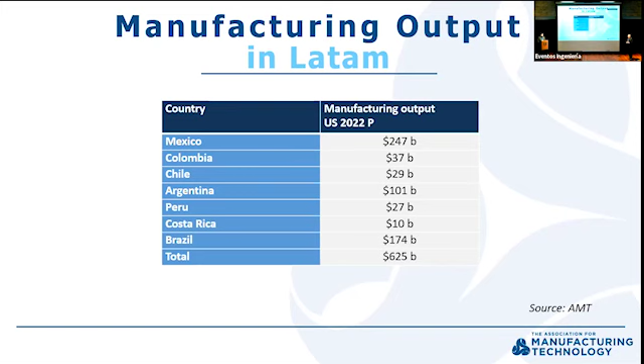Why is this so important to AMT and its membership? Because the manufacturing output coming out of those 5 or 6 countries that I just reflected is close to $600 billion. This is almost 1/3 of the total output of the United States, and almost 1/4 of the total output of Western Europe. So it's that important, the growth and the volume produced in Latin America. Go ahead.

So consumption, as I explained, is really important. This is just an overall consumption of the manufacturing technology realm for 2021. It reached $6.8 billion worth of consumption. This is not including automation. This is not including metrology. And so if you compound those 2 figures and then add the growth of the consumption and adoption of manufacturing technology through the Americas, this is going to really get to about $10 billion. So that is the opportunity of the market, and that is the need and the outcry of the manufacturing community through Latin America, which is why we're here today.

All right. So now we're going to talk about the adoption of technologies in Latin America. We in AMT, through our Vice President of Technology in our technology department, are always measuring and monitoring what we call the transformative technologies.

For us, transformative technologies are those which are going to really change the landscape of a job shop or a manufacturing facility in the next 10 to 15 years. And we identified 10 of those, and Daniel Garcia is going to talk to you about some of those things and the state of the industry and how that is being implemented throughout Latin America.

And then we're going to position ourselves talking about the smart retrofitting activities and some of the initiatives presented, not only on the hard side of the business, as I call it, meaning manufacturing, technology, machines, equipment, but also on the talent development, which is also supporting the normalization of the experience and the knowledge base of all the human resources, which are the ones operating the machines.

Advanced CAD/CAM software makes your life very easy, since you can transfer the designs to the CAM, and also ultrasonic machining and the MPA, which is the engineering department from AMT, who help companies or anyone interested to create the technology roadmap of an implementation in the industry.

So the first thing we noticed you can improve in smart retrofitting for metalworking is the spindle. Why the spindle? Because it's the most expensive thing, the most important thing on the CNC machine. With this type of spindle you can do a lot of things: increase revolutions, change the bearings, change the lubrication, change the coolant, and get a lot of benefits that we already saw implemented in a lot of industries.

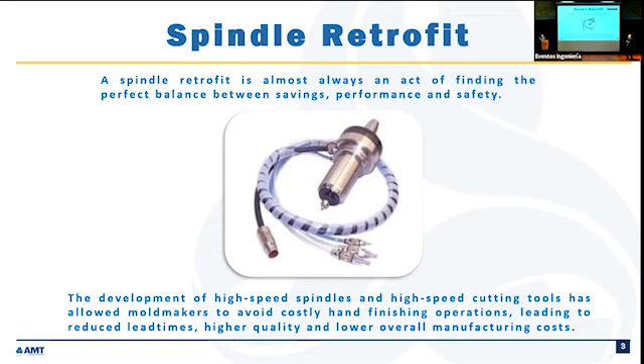At the end of the day, if you are an entrepreneur with an old machine where you could cut parts at 3,000 RPM, you can change one of the basic components, one of the most expensive portions of the machine, the control and the spindle, and that spindle will allow you to threefold the RPMs and cut even more exotic materials. That's part of what we recommend with spindle retrofitting, right?

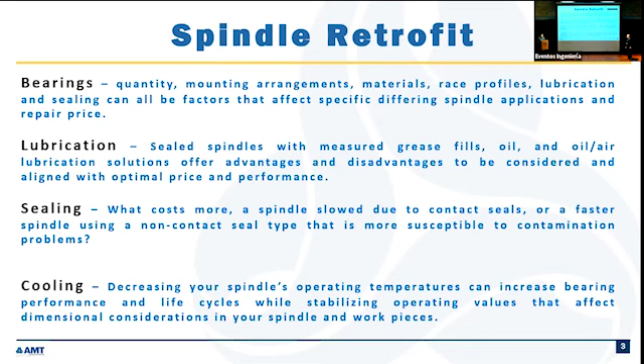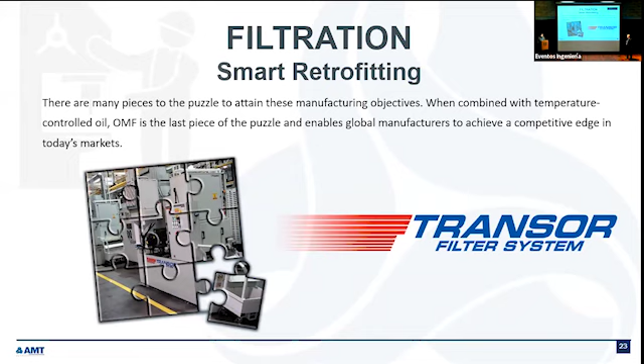Yeah. Another very important thing is the filtration system. On the market, some of our members have a lot of solutions that increase the life of your tools, the machine, the spindles, and everything. These solutions are everywhere, but a lot of people don't know they exist. Instead of changing the whole machine, you can adapt these technologies and get better results.

And this has to do with the fact that in talking to Uniandes and Tec de Monterrey, we discussed expanding the reach of smart retrofitting not only to the machine itself, but to the whole ecosystem surrounding the machine, including auxiliary equipment. This also has to do with the new EPA regulations and the Save the Planet efforts.

In many machining operations around Latin America, the oil used as lubricant is not well maintained, meaning you have to change the whole oiling system far more often than recommended. By adding the filtration system, you can really extend the life of the cutting tool, protect the spindle, and avoid having to dump or segregate the oil, because you can reuse it again and again, which is why we call it smart retrofitting.

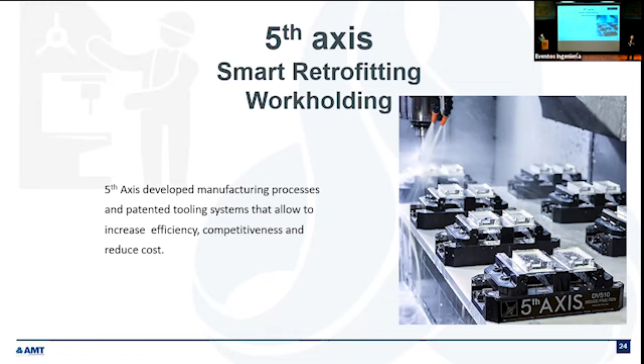Go ahead. And not everything is related to the equipment, there's a lot of solutions that can impact directly on the workers and the factory. Like the smart air cleaning systems from Hastings, which is one of our members. They produce very smart equipment which is constantly monitoring the quality of the air, and it works when the concentration of fumes or anything in the air passes some level.

And this causes a lot of savings on energy and avoids a lot of health problems that the workers can have in the factory. All right. Good.

One other solution that we were talking about is MTConnect, which is a protocol, a free license that you don't need to pay anything for. You just need Ethernet wiring, connect your machine, install the adapter and agent, and start to communicate. So it's simple like that. A lot of people don't know, but this is mainly focused on new equipment.

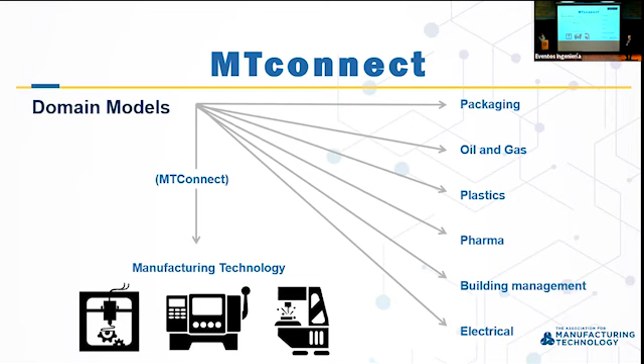We already have a partner that we are going to talk about, that develops a lot of electronics and also software solutions for companies, so you can create a very complex project, or you can create a very simple project, which we're going to see in the next slide.

Do you want to? Yeah, all of the colleagues throughout the conference have been talking about the digital factory. The digital factory is being able to interconnect your machines so you can really start catching up on productivity. You can really start analyzing the data that comes out of the machine, and you could really start making smarter decisions based on the readings that you're getting from the machine.

One of the actual realities of living in Latin America is that most of the machines deployed throughout the ecosystem don't have native interconnectivity, because some of those machines have been in place for 17, 18, 19, 20 years. So either you go to RS-232 or to the old data transfer systems, which are very slow and not as complex or as broad as the new applications are.

So in order to normalize ecosystems with the information from the new machines you might be adding to the factory, you can also add new adapters or small hardware devices, which allow a machine to communicate the KPIs or the key data that you want to extract. And then you can start making decisions. That's part of what we call the digital factory and smart retrofitting, once again, by adding one, two or three components and taking advantage of the whole bench of the machine as it is. All right?

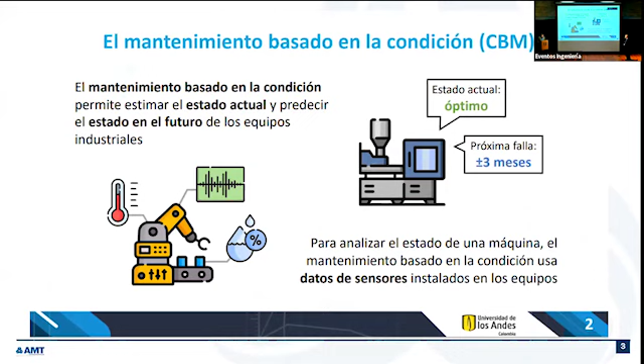I want to talk a little bit about this related project. It was developed last year along with a partner in Brazil, in which some students from this university took a very simple piece of equipment, an induction motor, and made it smarter. They installed a sensor that monitors the vibration of the motor, added this adapter, and started to receive information to make it a little bit smarter.

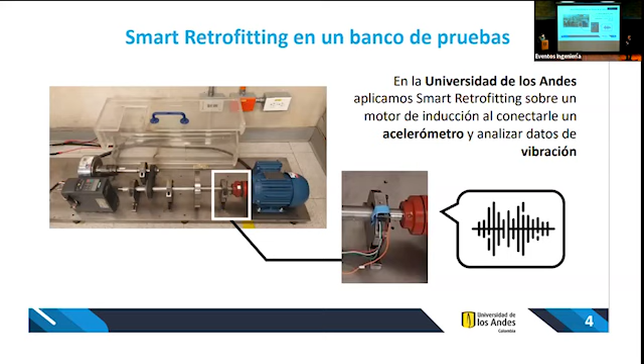So solutions as complex, or as simple as this one, can be implemented on different equipment in the industry. This is a paradigm; some in the industry are scared because they think new technology means they need to spend a lot of money. That's not always the case. So this is a really good example of that.

Yeah, one of the things that we're going to be doing at the Feria Internacional de Bogotá, along with working with Uniandes and also with a large distributor from here, from Colombia, is that we're going to try to bring together a digital factory replicated throughout the show. That means that we're going to have compressors, plastic injectors, and a lot of machine manufacturing technology, which is going

to be connected. So a lot of the end users and the consumers have the idea that in order for them to interact or create a network within the factory, even if it's 5 machines, 10 machines, 15 machines, it's going to take a good amount of dollars or Colombian pesos. That's what we want to change in the mindset. You can start by connecting the 2 critical machines or the 2 critical processes, and then you can start expanding and growing from there once the savings justify the continued expansion.

And that's why, changing the idea that making your factory or your job shop become digital is a very expensive project. Working with local organizations like Uniandes or Tec de Monterrey or different universities throughout Latin America is critical. That's part of what we've been doing, all right?

All right. Good. Anything else? All right.

Okay, there's a lot of players which are changing the ecosystem. Well, this is another tendency which is coming from the United States and Germany and different places that are implementing these new technologies. They call it the ACE, which is artificial intelligence, additive manufacturing, advanced automation, and augmented reality. These technologies are going to change the manufacturing floor of the industry, starting from the United States and different countries and then coming to Latin America. You can start seeing that.